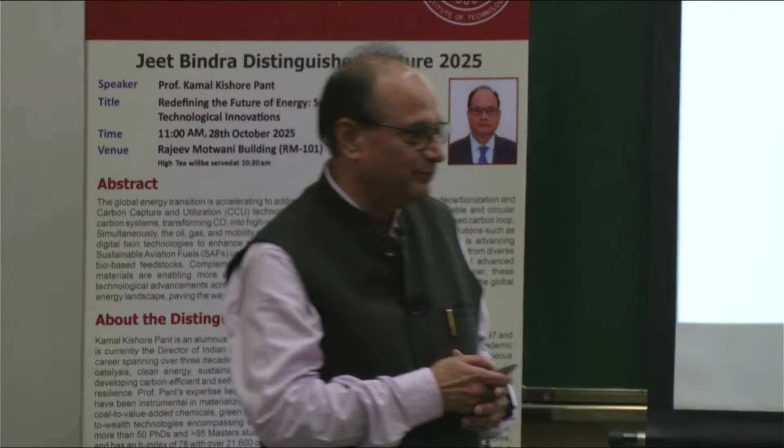And before going for the lecture, which is a very general lecture, I would like to thank Honorable Mr. Jeet for bestowing this distinguished lecture series to IIT Kanpur, and it's an honor for me that I am standing in front of all of you because of him here and delivering this talk. So thank you, Mr. Jeet, and his achievements are already well known, and I remember the Professor who had been my advisor, who graduated from here during 1968, and had been the Chevron chair professor, which was also donated by him.

I will just give this talk, if you look at the title, the energy scenario and industry perspectives, and especially for the younger generation, how can they move forward from their PhDs to the next level, whether in industry or academia. That's more which is challenging for the future, if you look at the transformational research, because everybody is talking about the applied research, everybody is talking about the translational research and how it can be multidisciplinary, interdisciplinary. Those things are also becoming challenges, especially for the young generation.

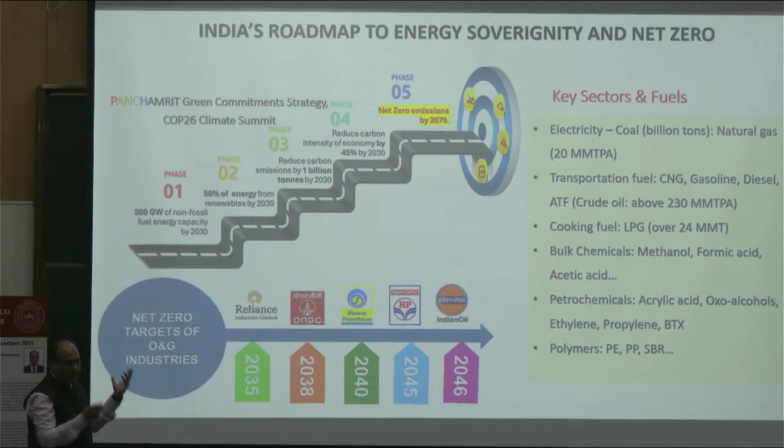You see what is happening, a term given by Honorable Prime Minister Modi ji also, and phase-wise, 1, 2, 3, 4, 5, and we are talking net zero by 2070. 3.4 billion tons of carbon dioxide are coming every year in India, and if you look at the world, 42 gigatons of carbon dioxide. So everybody is talking net zero. Different countries have given different kinds of yardsticks to be managed in order to control this, and you see that 500 gigawatt out of this 1000 gigawatt should be renewable energy.

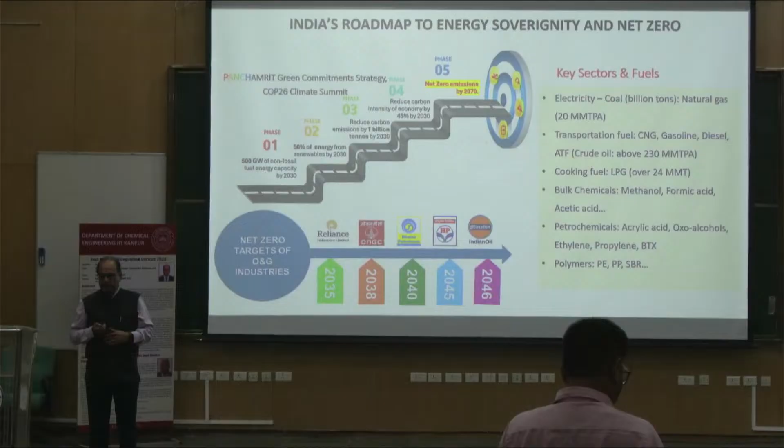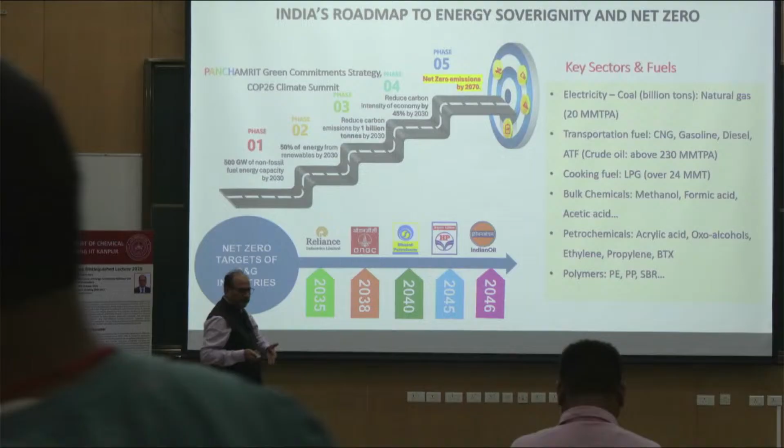Where will it come from? And we are talking green. How are you defining green? That's again challenging, because you are talking solar energy. Is it really green? Wind energy, maybe green, nuclear energy, pink. Different terms, words like hydrogen, gray hydrogen to pink hydrogen, have also been given terminology depending upon the carbon dioxide which is coming from there.

So this is very important, and you see that phase 2 is that 50% of this energy is to be supplied by renewable energy. 1000 gigawatt is the expected energy demand, and 500 gigawatt is to be achieved by this. Then the third phase is to reduce the carbon emission by 1 billion, that is, 1/3 of the carbon is to be reduced by 2030. And then phase 5, which is very important, is net zero. 2070 is quite far, but the target is 2060, because most of the developed countries are targeting 2050.

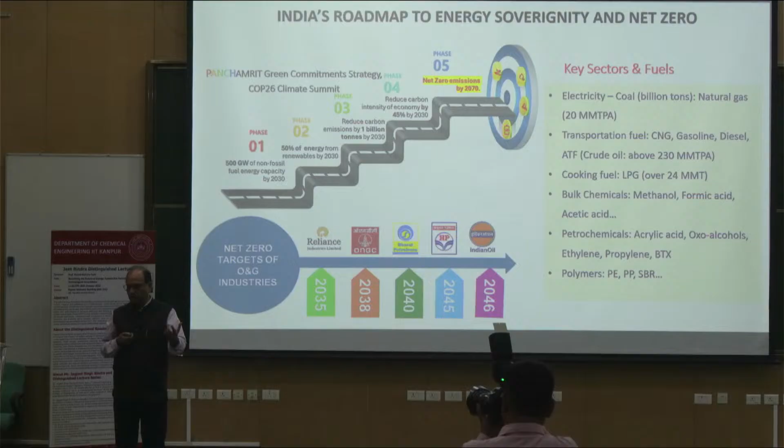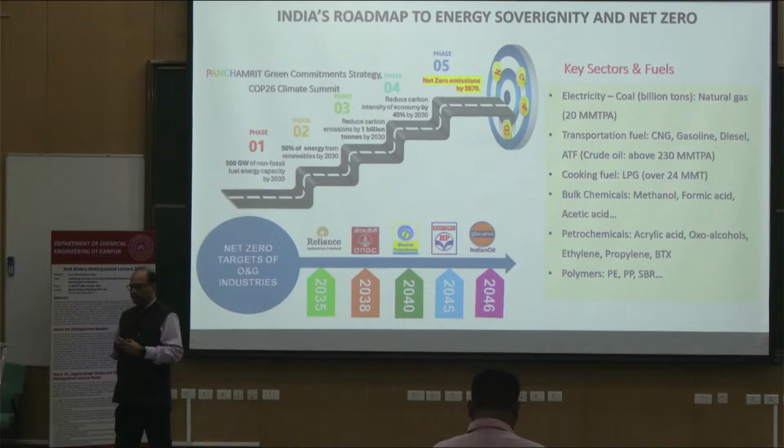So that is again where we have to match with the world, how they are moving and how the science and technology, which is coming up in a big way in the country, can bridge the gap. That is also very important if you really want to move from a developing to a developed country. So that is very important. And this is the scenario. All of you know these things.

So we are talking about a $10 trillion economy. That is the developed country we are talking about. By 2030, that is the 10 trillion. Presently we are around $4 trillion. So there is a huge gap. 25 versus 30, in 5 years you are saying that this $6 trillion is the additional economy which is to be generated, and how will it happen?

That's very, very challenging, and a lot of question marks are there whenever you talk about technology development, whenever you are talking in terms of the new research which is to be carried out.

40% of this primary energy, which is around USD 90 billion every year, is what we are importing, and we are saying make it fossil free. So that's again a challenge: what will we do if we don't import the crude oils? And there are a lot of issues, whether from Russia or the US or some other Gulf countries, where this crude oil is to be purchased at an economical price. That is again a very important question, because politically there are a lot of changes across the world. So that is also coming.

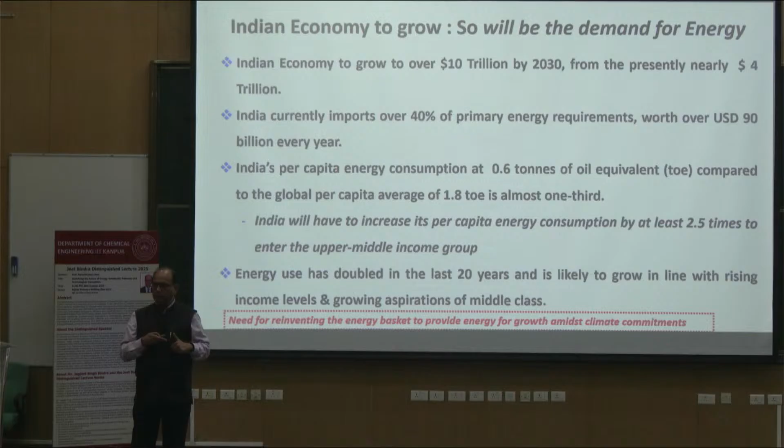And this is the demand and supply, and then climate change, sustainability, providing clean potable water and clean energy, and these are also integrated. Food, nutritious food, energy, and water. So this nexus is very, very important, because if you want to increase one thing, other things may be disturbed. So climate change, sustainability and balancing the ecology is very, very important and challenging.

So I say that coal remains, because 55%, or even 56%, is the share of coal, and as we are developing we have to reduce the consumption of the fossil feedstock, but still, even in 2047, there will be a share of coal. This is where we have to work on the indigenous coal, 240 billion ton of coal which is available, but it is high in ash.

So how can you design these? There are different kinds of fluidized bed gasifier, bubbling fluidized bed gasifier, entrained bed gasifier. What kind of gasifiers would be good? It is still a debate whether it should be just gasification, oxy-steam, pyrolysis versus gasification, what combination, and there are a lot of challenges because it depends on the amount of ash present in the coal. 20% ash versus 40% ash with Indian coal. So the entrained bed gasifier may be good for low ash coal versus high ash.

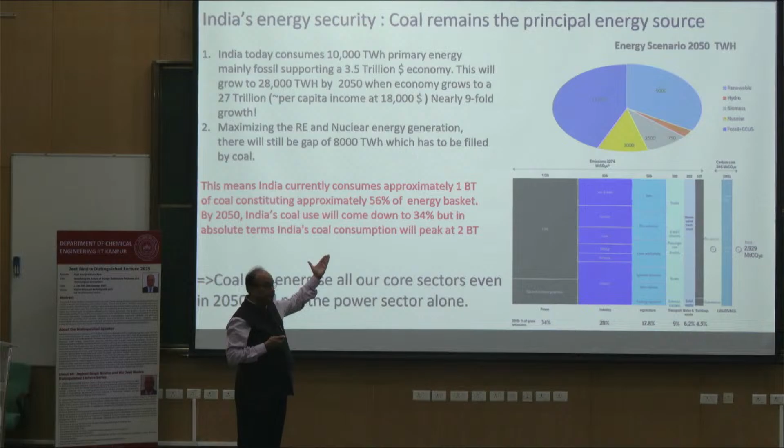So there are challenges which are to be addressed. What you see here: power is 34% of the consumption of energy, industry 28%, and different industrial sectors, and at the top, by 2050 in terms of terawatt hours, different sectors. Renewables will come up, no doubt, in a big way, but if you see the contribution of fossil derived feedstock, 11,750 terawatt hours out of the energy requirement we are talking about is still from fossil derived feedstock.

So something is to be addressed: how a low carbon product can be derived, or, if the carbon is high, how can you capture it? You know the hydrogen to carbon ratio is to be kept high when you look at a clean fuel. So how to get that? That's again very, very important, and we need to work. So coal will still be dominating, and that's why the Ministry of Coal, Coal India Limited, and the government are still emphasizing using this indigenous grade of coal effectively.

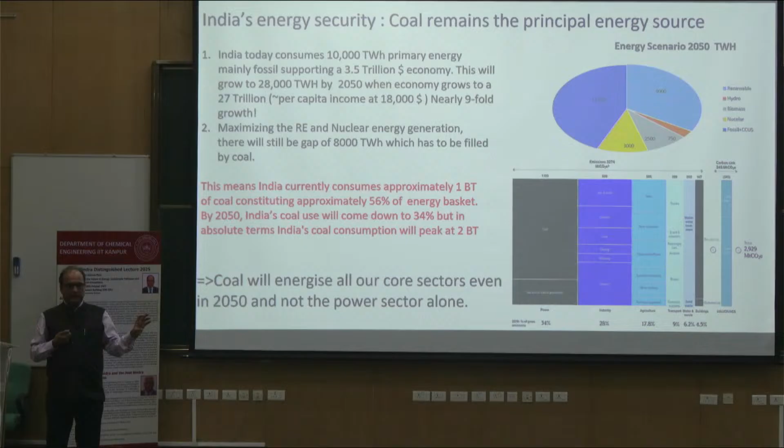So gasification or gasifier design is still a big challenge and a pertinent point for the industry, whether for power generation like NTPC, Thermax, or the refineries and petrochemicals, which are also using these grades for hydrogen or different kinds of chemical production. So a lot of work needs to be done in this area, 56% versus 34%, when you talk about 2 billion ton of coal which is being consumed or will be consumed in future.

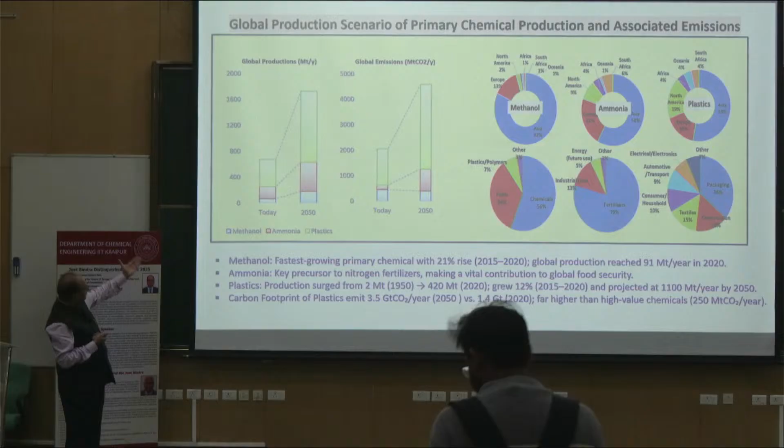This is the gap. You see today, 2050, when you talk about in terms of million tons per year of the productions, when you talk about methanol, ammonia, plastic, these will be the major products. And when you talk about plastic, huge amount of carbon, right? So net zero, when we are talking about a carbon neutral plastic, is it possible? This is what we are talking: the plastic where you have a high carbon to hydrogen ratio and you are talking carbon neutral, right?

So what kind of feedstock is to be used? And methanol, right? Just as I was discussing in the morning also, availability of methanol in India is a big challenge. And methanol is a very widely used chemical which is nowadays not only for refinery and petrochemical purposes, but also for vehicular fuel application.

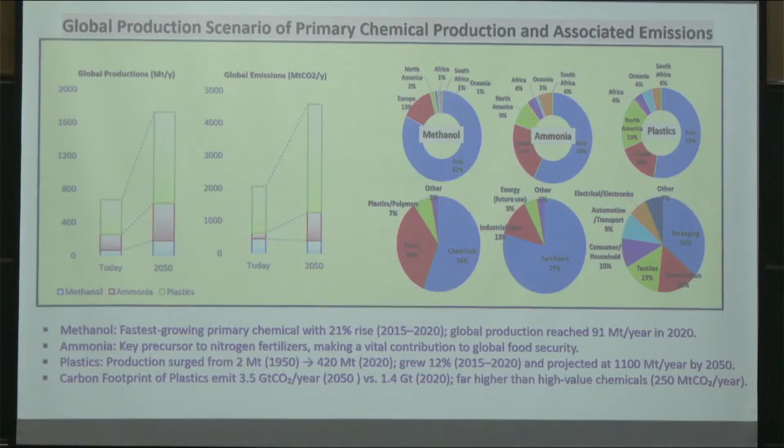So if you are using methanol for automobiles or ICE, internal combustion engines, you need to find out the properties for the vehicular application as well as the quality at an economical price. Because if your methanol is not available at an economical price, there is no use of producing methanol, rather import it from China or another country. So this is also a big debate: production within the country versus importing it from another country.

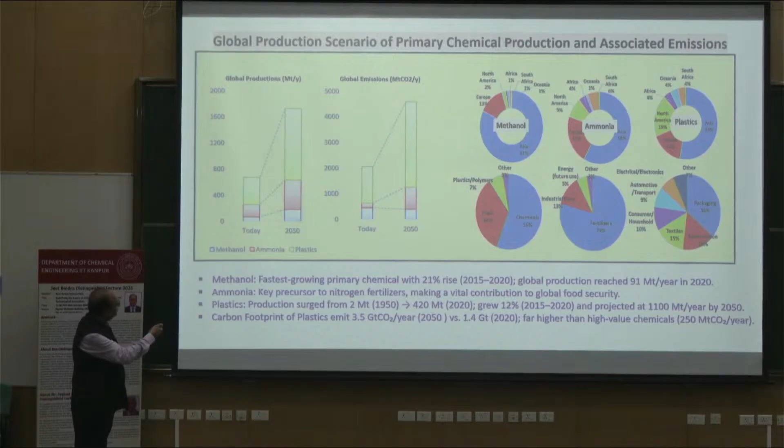So you see that methanol, ammonia, plastic are widely consumable chemicals for the future, and all the demands which you see here, in terms of how to bridge this gap. Because when you look at production of these kinds of chemicals, the carbon dioxide which will come from these products, the order of magnitude is reaching a level of 4,000 million tons of carbon dioxide per year.

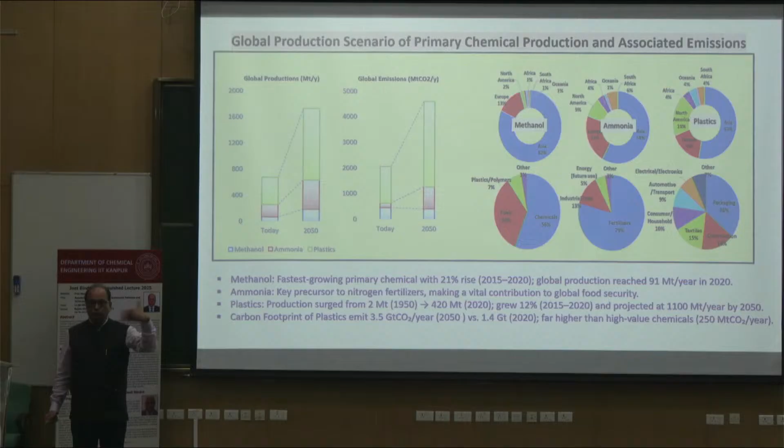So this is talking green versus producing carbon dioxide and adjusting the ratio of this carbon dioxide. On average, how can we reduce this number, say 100 grams of carbon dioxide per ton of product, to less than 100? That's where a lot of energy analysis, net energy rate, mass balance, process intensification, unit operation reduction come in. These will be new concepts for the future industry. Because reducing unit operations will definitely reduce the energy consumption in each process. So this is where we have to work on tabletop reactors, tabletop process design, simulate it, and then find out.

So this is what you see: carbon footprint, just an example for plastic emission, 3.5 gigatons per year, which we envisage by 2050 versus 1.4 in 2020. So plastic consumption is increasing, right? Even though we are talking about banning plastic, plastic-based chemicals produce 250 million tons of carbon dioxide per year, when you talk about higher value chemicals from fossil-derived feedstock and all these raw materials derived for the petrochemical industry, like olefins or aromatics, whatever is required for the future.

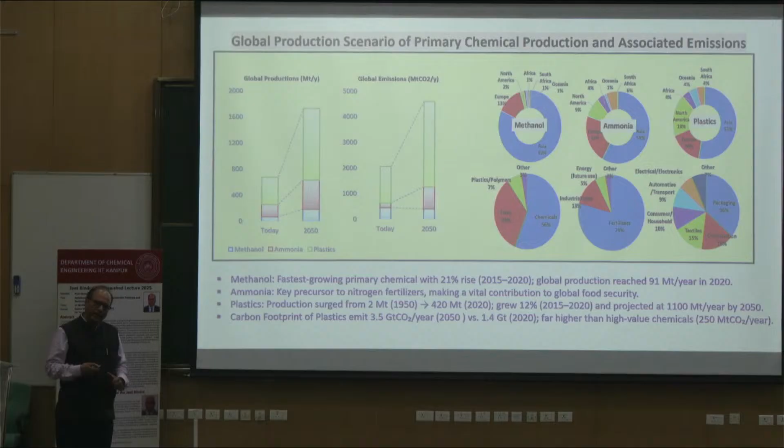So these last 4 bullet points are huge challenges which are to be addressed by refineries, petrochemical, fertilizer industry, steel industry, or any other pharma-based companies using these kinds of chemicals. So what to do, right? This is what everybody talks about. What to do? We have to do something.

The 2020s are being called the hydrogen era, right? Everybody has been talking for the last 5 years about green hydrogen, gray hydrogen, turquoise hydrogen, blue hydrogen. Those are from fossil-derived feedstock. Even turquoise hydrogen is produced from fossil-derived feedstock, just like methane decomposition, where you convert it into hydrogen and carbon nanotubes.

This is a good area. Dry reforming, I know many professors work on that. Dry reforming can also be used for syngas, then water gas shift reaction to convert it into hydrogen. And biogas can be used for that purpose. It cannot fulfill the entire demand, but part of the feedstock would be greener, and this is what the government of India is putting as a mandate for all refineries and petrochemical industries: that at least 20% renewable component should be involved with this fossil-derived feedstock.

So it means crude oil, add the bio-crude there, biomass, add bio-crude 20% of that and put it in the distillation unit. This is just one of the options which I am talking. Alternate can be also there.

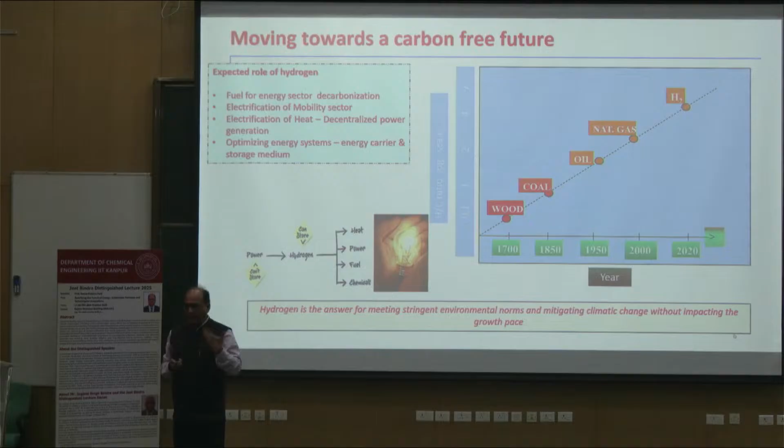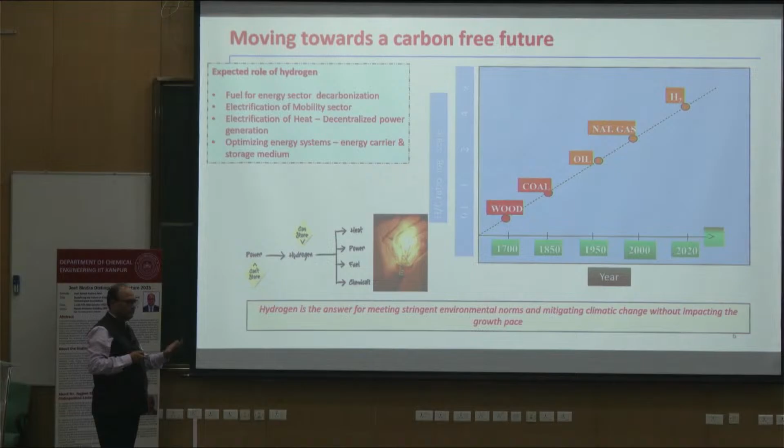So we need to look at all these kinds of things when phasing out wood and coal and moving towards natural gas or high hydrogen-to-carbon feedstock, which is the need for the future. And I think 2047 is far away, Viksit Bharat. But when we talk in terms of science, technology, research or academic units, I think it should start, and it has already been started, and we have to find out where we will be in 2030. We need to work in these areas.

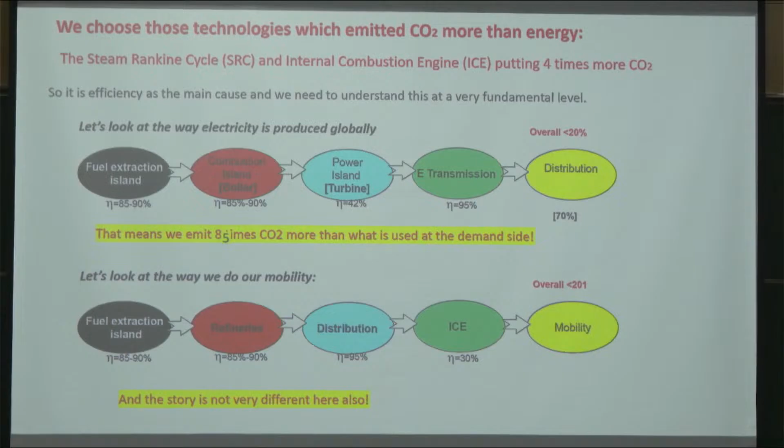You see that just traditional, right? You all study these things, right? Rankine cycles, combustion engines. You see the end point: less than 20% efficiency when you use your gasoline. Diesel, 20% efficiency in everything. And individually what you see, this is where we are, whether it is e-vehicle, vehicular application, or industrial. So efficiency is very low.

It means there are a lot of opportunities in between if we can improve the efficiency, or get rid of a couple of these intermediate steps. So the removal of the intermediate, what we call one pot, tandem process, a lot of things are to be done in that area. We are working at just 30% efficiency, and overall efficiency for vehicles is just 20%. That's why people move towards fuel cell vehicles, reaching towards 60% efficiency, or better than those where you can reach efficiency levels towards 90 or 98%.

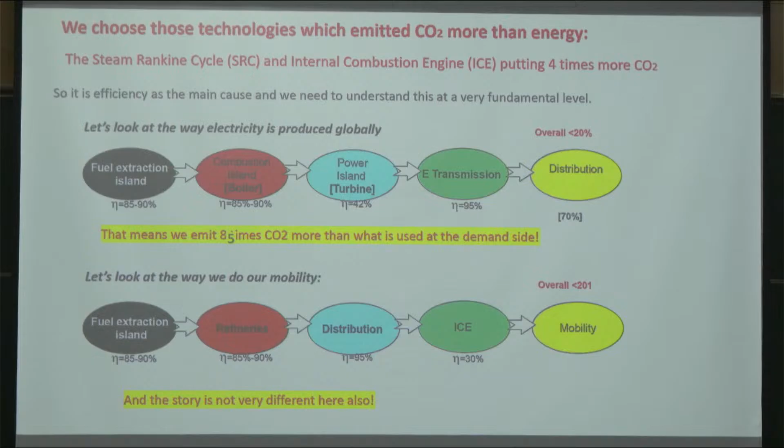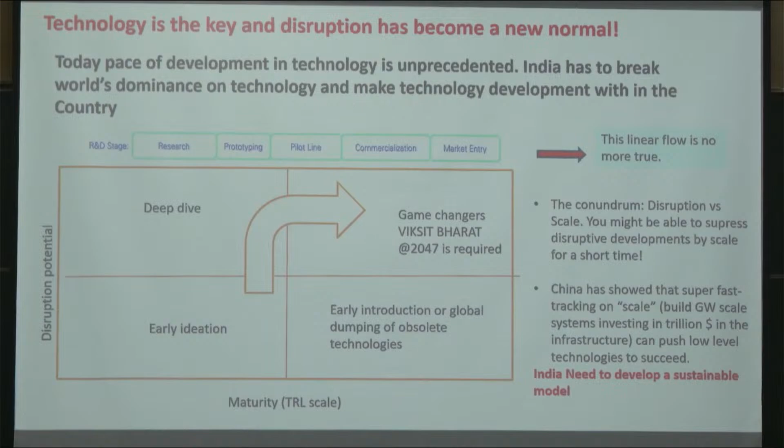I think that is the one thing: energy production and designing the system in such a way where the losses are at a minimum, and it is also very important to work on these traditional Rankine cycles or ICE or alternate vehicular applications. So this is where the straight linear versus some kind of bending in between is important in terms of the disruption potential.

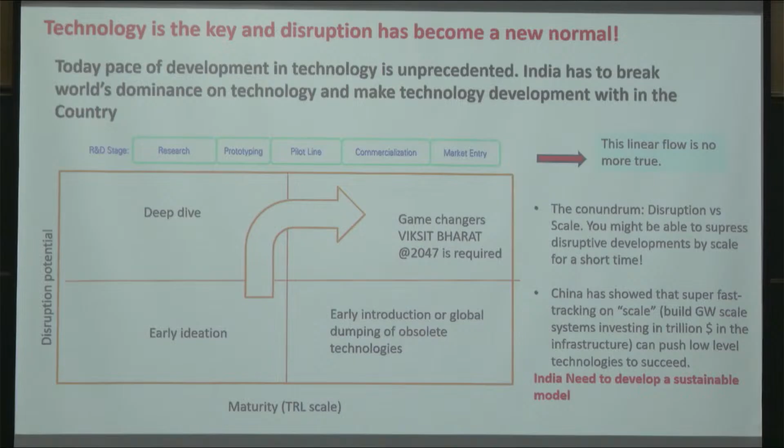And when you talk about the technology readiness level, what the industry actually wants and what research is being done. Most of the time academic research is limited to TRL3, but I think there is a need, when the ideas are there, for ideas to innovation and investment. This is what the younger generation is now doing, with startups coming up in a big way, and the concept of tinkering labs now being used. So when there are ideas, we have to work so that these ideas can be taken to the next level.

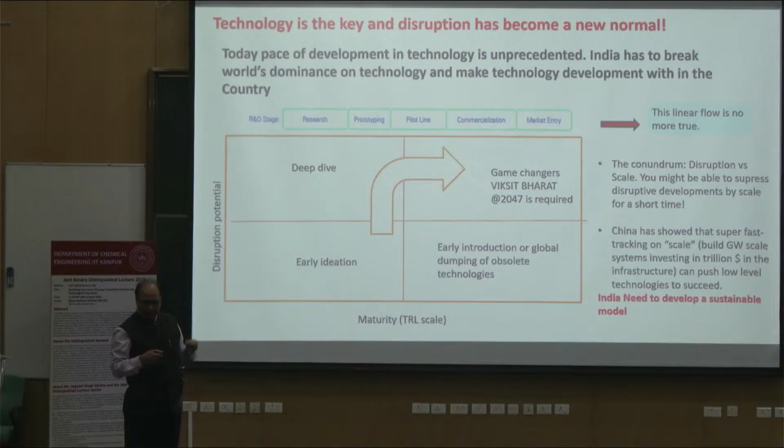So when the ideas are there, we have to work on that and bring it towards a maturity level, and that is where TRL9 and then commercialization is required. And you see disruption versus scale; this is the conundrum. You might be able to suppress disruptive development by scale, and that's why everybody gives the example of China, because when they have the ideas, they invest huge amounts of money, and sometimes reverse engineering is also done by them.

So reverse engineering is also accepted. You get the right product, open it, study it and then develop the new process, and that is also very important. I think the government is allowing that kind of reverse engineering also, and we should work in those areas.

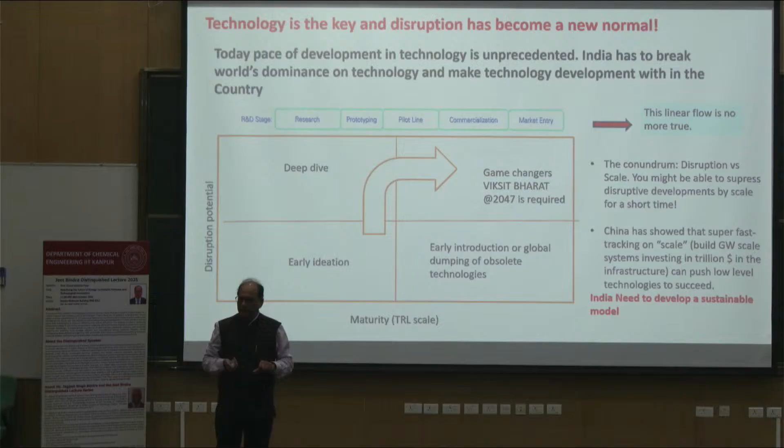And most of the time, you see even industries like e-waste and metal extraction, the factories and companies buy the equipment from China and put it here. Okay. But now do reverse engineering on that, improve the efficiency and develop the product within the country, rather than purchasing again and again from there. So I think that is also very important for the future: developing a large maturity level from ideas to the product.

So past, present and future. So future, of course, everybody is talking about green energy, right? But how much green, that will be a little bit questionable, right? But that's true that the coal, nobody likes, it's a black and dirty material. So coal, petroleum, natural gas, already, right?

People are moving in that natural gas demand is increasing, and future will be somewhere where you talk about the hydrogen, biomass, biopolymers and all these things, right? Tissue engineering, healthcare, all these things are coming up using these kind of biomass-based products. So lignin, cellulose, and India has those kind of, right, the pulp and paper industry where these kind of materials

are available, and that is where e-market is coming up, electro-based, right, where the methanol can be produced, plastic can be produced, so e-plastic, e-methanol. So that is again another terminology which has been given in terms of green energy. And for these, you need to do a lot of R&D, right? You have direct air capture, carbon storage, and then convert it into value-added products, that is utilized, point source capture. So many things are there. All of you must be aware.

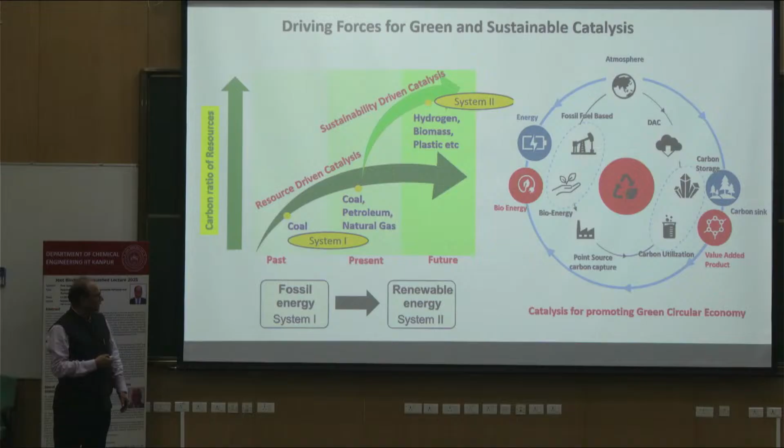The fossil energy system is to be replaced by the renewable energy system, and that is very important for the future. I'm not going in detail of this, but one thing is clear in this, that we talk about 3 tons per ton of the carbon dioxide which is being produced per chemical produced, whatever the chemical.

And the last thing which you see, recycling, circular economy, that will bring to that level, right, versus biomass also to some extent. But if you talk just the carbon capture and utilize it, then the electric energy which is required, what would be the source of that electricity? Means we are capturing carbon dioxide, converting into other product, but how much energy is required to convert carbon dioxide?

You know, it is a rigid thermodynamic molecule. It will require huge amount of hydrogen, and where from this hydrogen is coming is a question. So conversion of carbon dioxide to value-added product, although a lot of R&D is being done, but the success story is not good. This is the fact. So this is where we have to catch the market for the future, that required carbon dioxide or CCUS.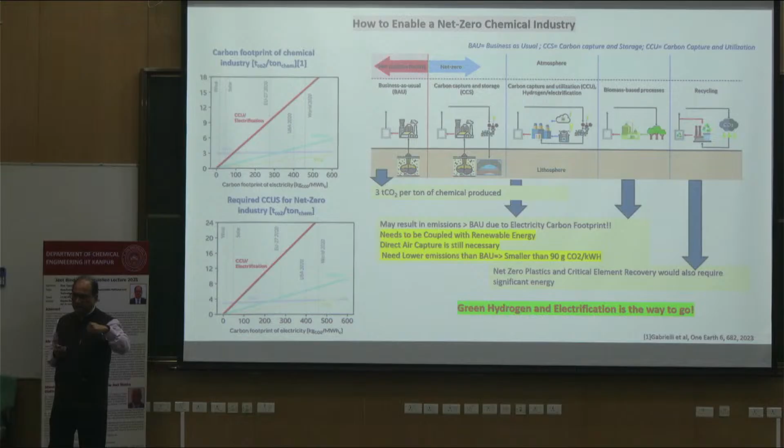CCS may be easier because there you are not using hydrogen, but for CCU, although CCU is much more desired by the industry, process industry, the challenge is there that you have to look at your business as usual, that is due to the electricity carbon footprint, because whatever the source of energy you are using for producing the hydrogen, that is making this carbon dioxide conversion into fuels and chemicals a much more rigid and energy intensive process.

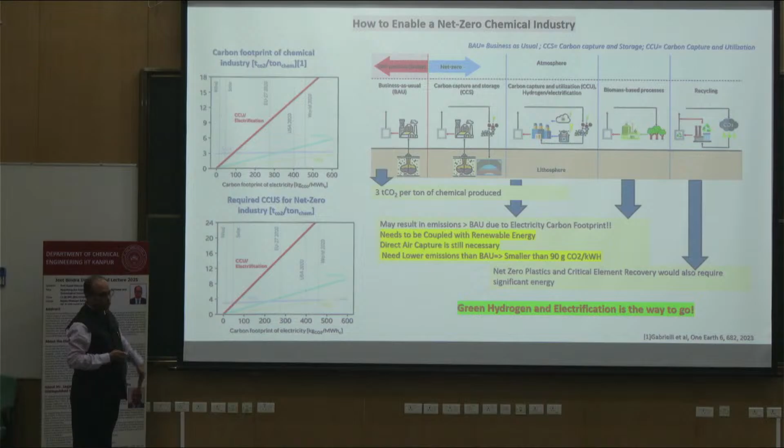And that is the last one where you have to look at, you have to work in those areas, and then you have to find out that 3 tons carbon dioxide per ton of chemical produced is to be reduced much below. So that's where the numbers are. Already the US and some developed countries like France and Europe, they have achieved this model, 90 gram carbon dioxide. So below 100 is a good number.

So this is what you see the pace with the refinery. When you talk about the refinery, petrochemical, integrated approach, you say that your carbon feedstock transition is very important, and we have to find out the new kind of materials, raw materials at a sustainable economical price. That's very important. And then your pace of technology, because this is where the disruptions are in between. So this is not a straight path.

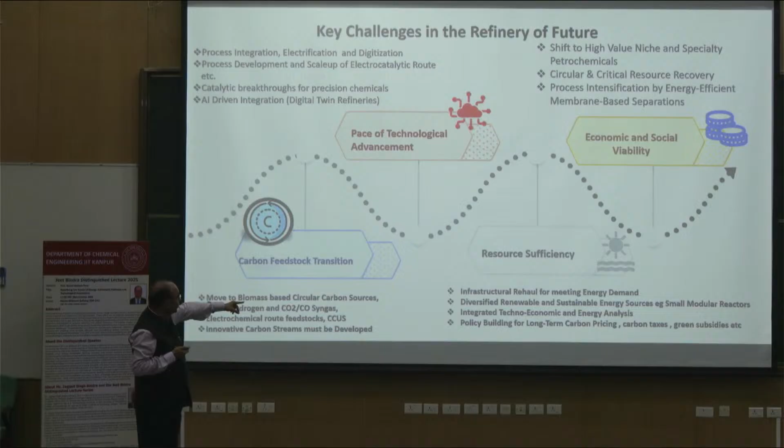Disruption in terms of technological advancement, which is very competitive. Resource sufficiency, because sustainability is very, very important. We have to work on that. And economic and social viability, again, commitment toward the society. And this is where the challenges are to be addressed, that AI-driven digital twin refinery. Data are available, right? And we have to study this real-time data analysis.

And that is where I think there are a lot of opportunities for the younger generation, those who are working on AI-assisted technologies and developing these kind of digital twin refineries for the future. And then some kind of process intensification like membrane-based processes, because the distillation process needs to be replaced.

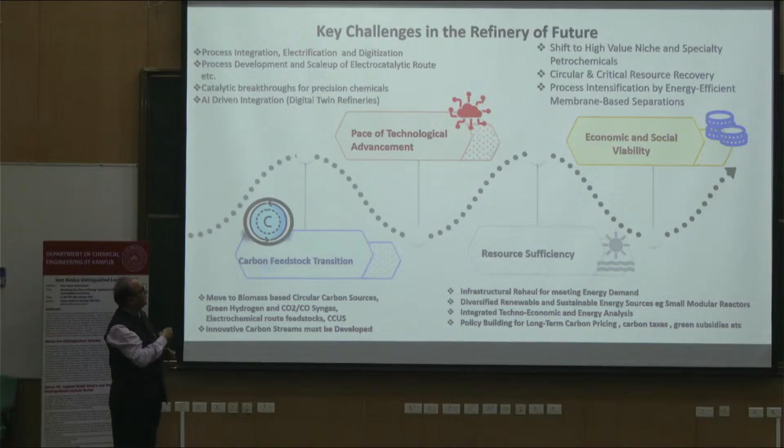It is a hugely energy-consuming process. So if these can be replaced by low-cost, more resistant membranes, I think that is also very, very important for the future. Circular and critical resource recovery, a shift to high-value niche and specialty petrochemicals, that is where I think the future is in terms of the refinery, and they are putting a lot of pressure on that.

You see the different types of emissions measured as S1, S2, S3, right? So S1 is direct emission: refinery combustion, hydrotreater, cracker, steam methane reforming, all these are emitting a huge amount of carbon dioxide. Scope 2 is indirect energy emission: electricity from the grid, natural gas, crude oil, all this. Scope 3 is indirect energy emission from the use of conventional fuel, road transport, industrial.

So all these are contributing to carbon dioxide emissions, and the left-hand side is giving you the real picture. This is the steam methane reforming, right? You see the products, ammonia, methanol, ethylene, propylene, aromatics, all very important products from the petrochemical or refinery. And in every process you see the carbon emission per ton of product; a huge amount of carbon dioxide is coming. And if you look at capture, you have to invest money.

So this is the future, where with fossil feedstock you have to capture the carbon; that is the conversion approach. On the sequestration side, you have to look at unrestrained release of carbon dioxide, capture and storage, and finally thermal power generation and also renewable power generation. Where will we go from here? This is just speculation. And how can we work on these in terms of indirect energy related, direct energy related, and process related emissions.

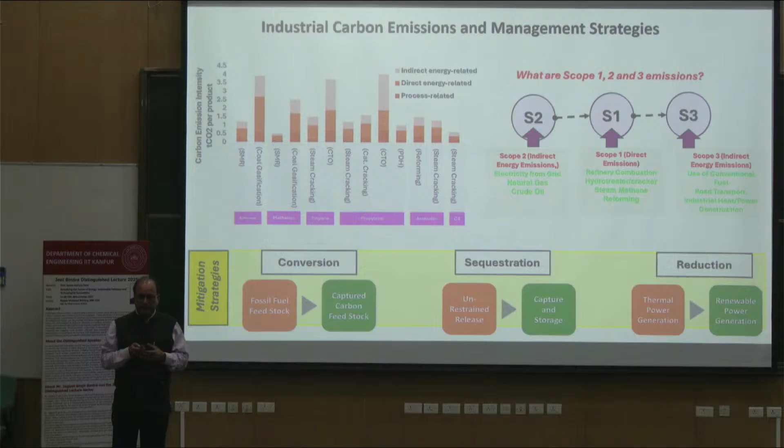And again, there are a lot of challenges and opportunities for the future in terms of R&D. In every sector we have to do a carbon analysis, some kind of life cycle assessment, and then find out the net energy rate required for a given process. So process intensification, traditional thermodynamic analysis, exergy analysis, these would be required for every process industry, and try to miniaturize the size of the refinery, a tabletop refinery. That should be a concept for the future, and this can be done.

There is one example I have kept here, because we work on methane decomposition to hydrogen and carbon nanotubes, and are now working on biogas methane decomposition, which can be called green hydrogen. So these are the challenges, and refineries are now addressing what substitute can be used for traditional steam methane reforming. Now there is ammonia-based, plasma reforming; plasma processes are also low-temperature, non-thermal plasma.

So the typical Haber-Bosch process for ammonia synthesis, which is done at 200 atmospheres, can be done at atmospheric pressure now. So this is where the trends have come, but how will you scale up those kinds of reactors? That is again very, very important for future study. So non-thermal plasma for ammonia synthesis, and for CO2 conversion and reduction.

Just a typical example: the energy consumption of steam methane reforming is 3 to 4 kilowatt hours per kg of hydrogen, versus with carbon capture it reaches a level of 45 kilowatt hours. Why would one do that? Because the energy consumption has changed from 3 to 45. And if you go for water electrolysis, people are talking green hydrogen, right? But this is the data, around 2022: 45 to 49, up to 55, that is the range for water electrolysis. But methane pyrolysis has the advantage.

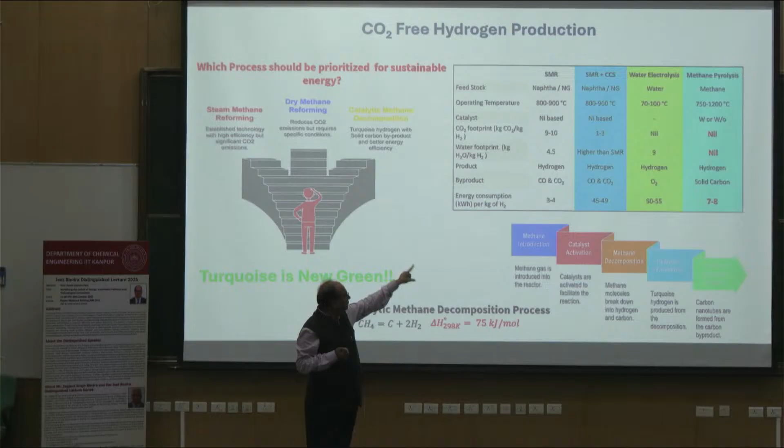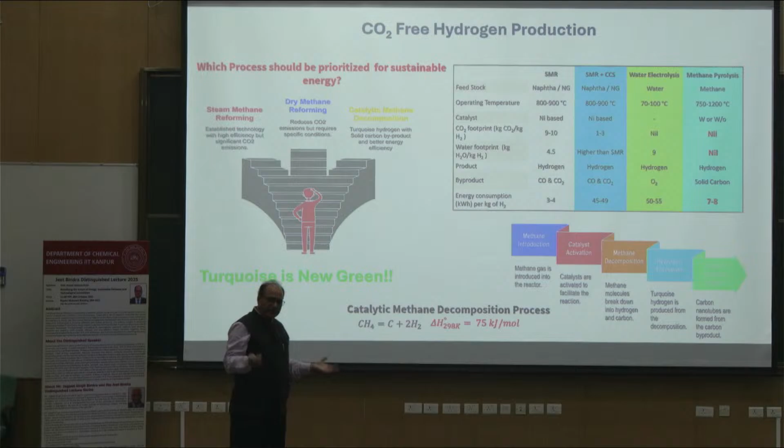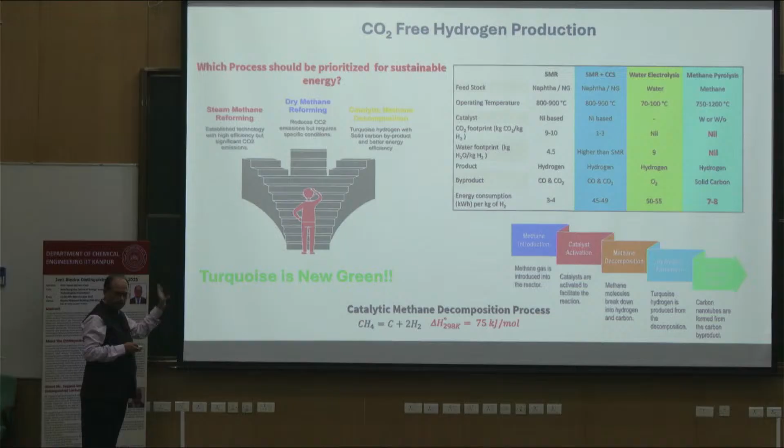You are getting the carbon as a solid, no need to capture it; the only thing is that catalyst design and reactor design may be challenging. Different heating approaches can be used, and you can have turquoise hydrogen. Turquoise hydrogen is very close to blue or green hydrogen. So that's what we need to work on: how to take the existing established technologies, revamp them, or find ways of improving the technology. So turquoise is that kind of word. You see the complexity for the future refinery, right?

All kinds of feedstock, not just the fossil-derived feedstock, but look, everything is there. You have the waste, MSW, use it there. You have the plastic waste, use it there. And several renewable energy components like solar energy, wind energy, natural gas, biogas, crude oil. It means whatever you have, you use it in the refinery, and then you have to find out the design. You work for that, right?

So versatile kinds of feedstock, and then find out the methods, how it can be, whether oxygen is required, hydrogen is required, where these will come from, and then you have blue hydrogen, and this is where you directly integrate it with the petrochemical, because the gases which are coming can be integrated, and you can have e-fuels, you can have all green, and the ammonia which you call blue ammonia, calcium carbonates, and carbon dioxide. So whatever you have can be used for multiple purposes.

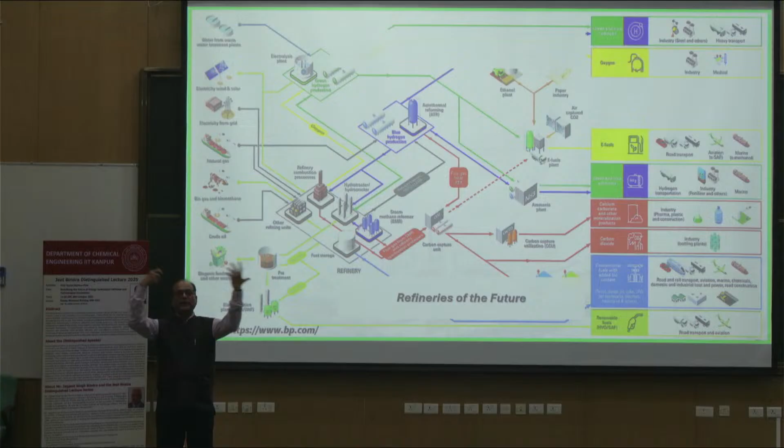So this is where we talk zero waste, or, as an academician, you must have read about the E factor, right? How much pollution you are creating when you are doing that. Because thermodynamics simply says that when you are converting A to B and A to C, if B is desired, you try to work toward 100% B. Thermodynamically it may be difficult, but you have to work for that. You have to use some technique in between which can disturb your thermodynamics.

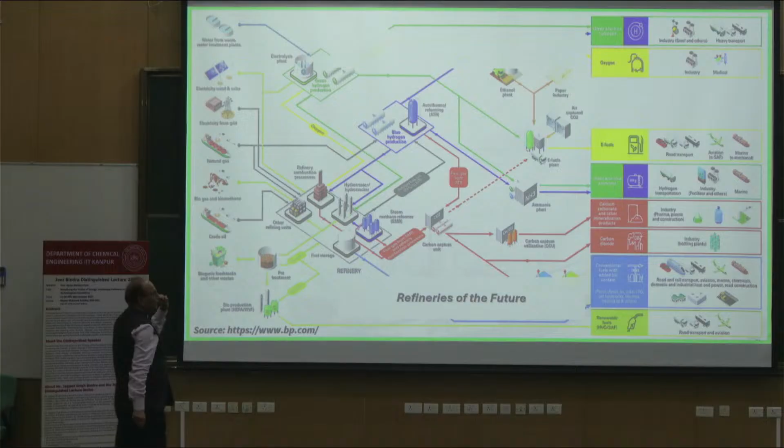So we have to talk about atom efficiency, and this is very important, that 99.9% should be your desired product. Otherwise, a lot of energy is wasted, or for the separation of the product. This is the challenge. So something is to be done where the unit operations going on in the process can be minimized, and for that also a lot of work is required.

This is again just an example. We are working on this. So gasification versus combustion. Both are used for power generation or maybe some kind of coal to methanol process. But you see that in terms of coal combustion, you have to use CCUS, then the carbon dioxide or the products you have to sequester, and then with coal combustion you have to work with the steam cycle. All of you know these things, power distribution. So if you look at the overall efficiency of the process, it's very, very low.

The second thing you see is coal gasification. This may be a little bit questionable also, but you have to do a complete energy analysis for both again, and now tools are available. This is hydrogen or mineral, whatever you use for gas cleanup, acid gas removal, all this. You have power, you have hydrogen, chemicals. So when you talk about the energy analysis, this is a higher pathway and gives you multiple products. That's why I think combustion can be replaced by gasification, and this is what's shown here: 8 to 12% efficiency versus 48% efficiency.

So this means analysis is required, of unit operations in every sector, exergy analysis, and these are the new opportunities for design of new units for the future generation. So this is where the gasification itself is a very, very costly affair. And when you talk about how good a gasifier is, whether it is an entrained bed or a bubbling fluidized bed, all of you have read the traditional Levenspiel. So how it can be done, this is where I think the work is required.

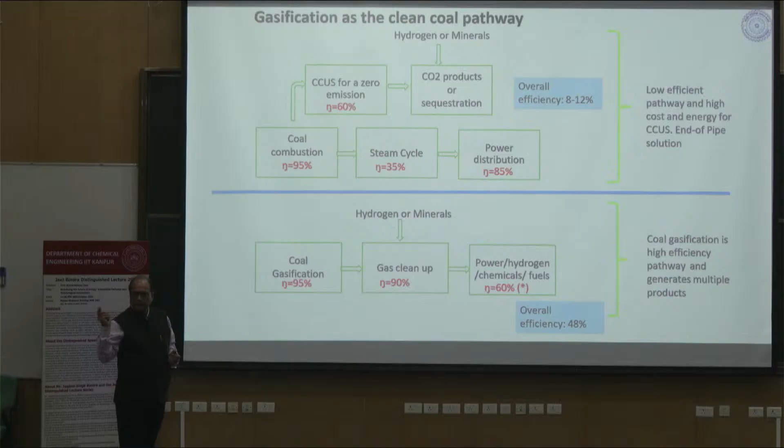So this is the work which we did with Thermax as a partner on coal to methanol, supported by the Department of Science and Technology, a notional plant of 1 ton methanol. We used just the high ash coal, 40% ash coal, and lignite-based coals, which are considered not good. Most thermal power plants blend Indian coal with some high-grade imported coal, either from Australia or Indonesia, and then gasify it. The reason is that gasification of high ash coal has a lot of issues in terms of ash, clinker formation, and the hydrodynamic study.

Most of these things, whether it is what should be oxygen, what should be steam, these ratios are also very challenging, and that's why there are a lot of opportunities to study. If these issues can be resolved, then there are opportunities for the industries, or Ministry of Coal and financial support also in these areas.

So you see that gasification, and then you do some water gas shift reaction, that depends. You will have, again, carbon dioxide from there, the acid gas removal unit, and all gases are removed, and finally this is the CO2, and the CO2 is again being sent into a reactor because we want to use CO2 hydrogenation and produce methanol in a single unit.

So this is the second part of the Thermax project which you see on the upper part, but this coal to methanol 1 TPD is a notional plant working at Thermax, and there is the need for design of these kinds of gasifiers, which are still a challenge: 10 bar pressure versus 5 bar pressure gasifier.

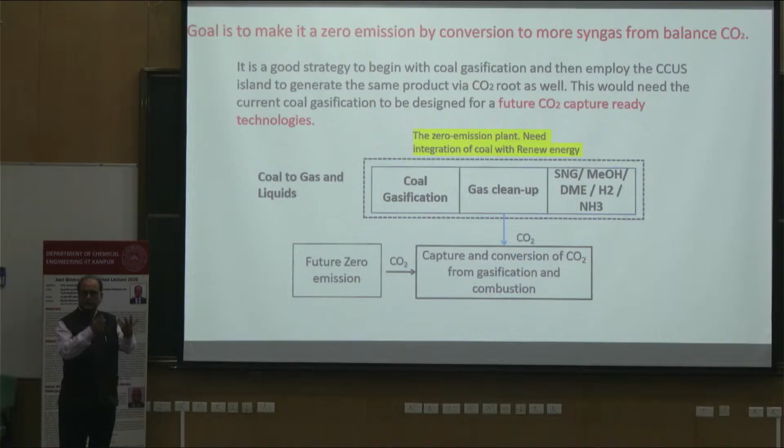So when you talk about the need to integrate coal and biomass, we need to work in these areas: coal to gas and liquids, coal gasification, gas cleanup, because when you do this, you can convert coal to chemicals, or coal to hydrogen. That's one approach. It can be hydrothermal, it can be a slurry reactor, or another kind of gasification. And when this is done, you can mix it with biomass also, coal plus biomass, or just convert biomass or municipal solid waste into RDF, refuse derived fuel, and mix it with the coal.

This is what NTPC now needs, 10,000 tons per day of this bio coal, because of the guidelines which have come up. So bio coal is also very, very promising. You convert the biomass to bio coal by torrefaction, and then transport it, because you are increasing the density of the feedstock. So parali burning and all these things you hear about near Delhi, Punjab, Haryana, those can be resolved, and even in Uttar Pradesh also.

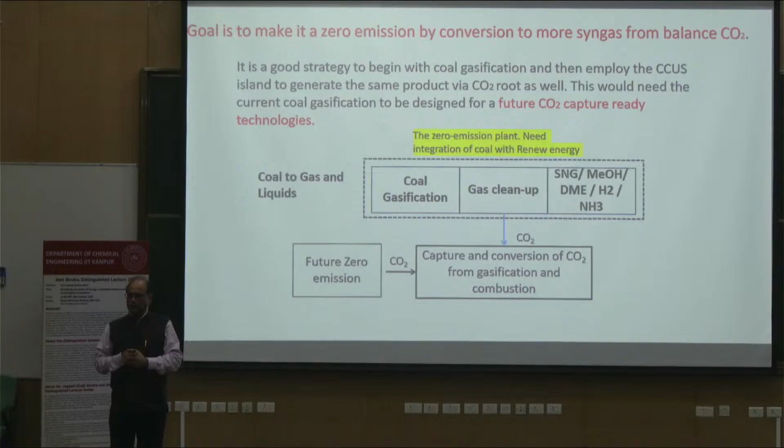So again, this is a wider spectrum: carbon dioxide from air, bioenergy, carbon capture and storage, fossil derived feedstock. You have to understand the chemistry of this, how much hydrogen would be required. Critical minerals are very, very important, because if you use catalysts, these are again precious metals and challenges for the future.

So spent catalyst metal recovery, converting them again into useful catalyst, versus the minerals, extracting the metal, because all these, whether energy storage materials, lithium, cobalt, manganese, graphite, carbon, are very, very important. So integration is required. You have to select the process from the different processes given here. All processes have pros and cons, and that is where we need to find out which process is the best. For one feedstock, it may not be a single process.

You have to find the most optimized process, and a lot of things are still at an infant level when you talk about carbon conversion, because carbon conversion is not a good idea in terms of the energy consumption in the process. Availability of hydrogen at an economical price is a big challenge. So this is, I think, where a lot of work is required.

This is what I said: carbon dioxide plus hydrogen converted into methanol or dimethyl ether or any chemical, olefins, SAF, everything can be done. But the question is where you get the hydrogen from. So this is the irony: 27 kg carbon dioxide, if you just use steam methane reforming, write down the reaction, around 13.5 it will come. Same thing with different kinds of feedstock, crude oil, where the hydrogen to carbon ratio is low.

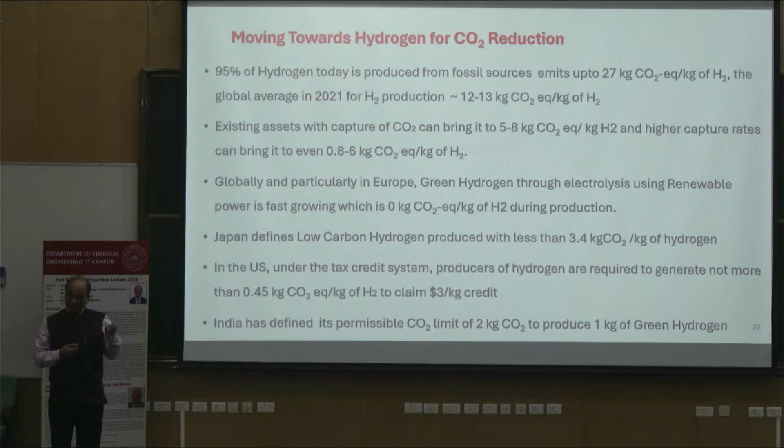So hydrogen at economical prices and green hydrogen which will not emit carbon dioxide, that's the challenge for the future, and that is again where the work is required. So this is where Europe, green hydrogen through electrolysis with renewable power, which is growing, is 0 kg of carbon dioxide per kg of hydrogen. So this is where an economical price matters, because cost will be very, very important for all these processes.

So when you see the refinery trends, it is very, very distributed now. The same refinery produces diesel, kerosene, and the same refinery can produce petrochemicals, methane, all kinds of monomers, polymers, asphalt. And this is the concept for the refinery where you use water, carbon dioxide, biomass; a kind of green refinery they talk about now, hydrogen refinery sometimes. So different words, but all these kinds of processes are required for the future in terms of conversion and transformation of the product. This is the need of the hour.

When you talk about e-methanol, I was talking about that. So in the pulp and paper industry, India has the potential of 20% of India's pulp and paper which can have biogenic carbon. This is the purest form of carbon dioxide. You need not work hard for separation, because in coal gasification the separation of the gases itself is very tedious, because there is ammonia, carbonyl sulfide, hydrogen sulfide, so acid gas removal systems, all these things are very, very costly.

But in pulp and paper industries, or the fermentation industry, that carbon dioxide is pure carbon dioxide. And that can be fermented, used for different purposes, and that's why words like e-methanol have come. LanzaTech, you see, in Panipat they have the 200 TPD plant, although there are some issues, because the enzymatic and biotechnological route is another important one, where temperature, pressure and energy consumption are low. But the only thing is that the conversion kinetics is very, very slow.

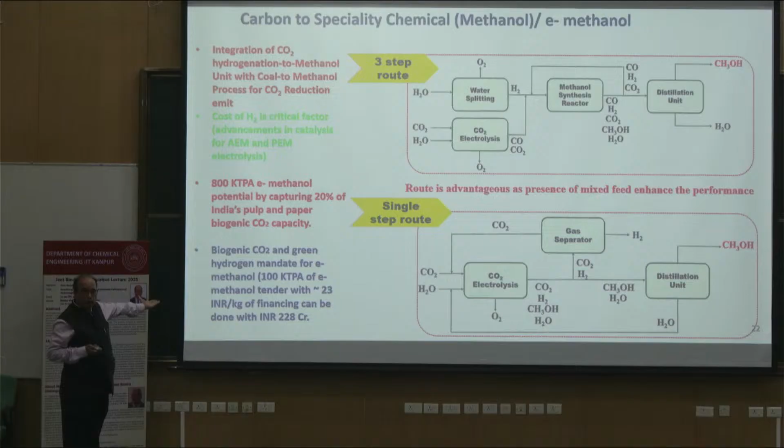So membrane design, all these things are very, very important. So biogenic carbon dioxide, green hydrogen, and this e-methanol: 100 kiloton per annum of e-methanol has already been tendered at 23 Indian rupees per kg, that will be the cost, and the financing is of the order of 228 crore for this kind of project.

So pulp and paper carbon dioxide, fermentation-based carbon dioxide, these can be converted into chemicals, and these are much greener chemicals, and that is the electrochemical routes. You can talk on those processes. So, right, green hydrogen supplementation, because you have to integrate the carbon dioxide if you are talking about conversion and utilization, then all these factors are to be considered.

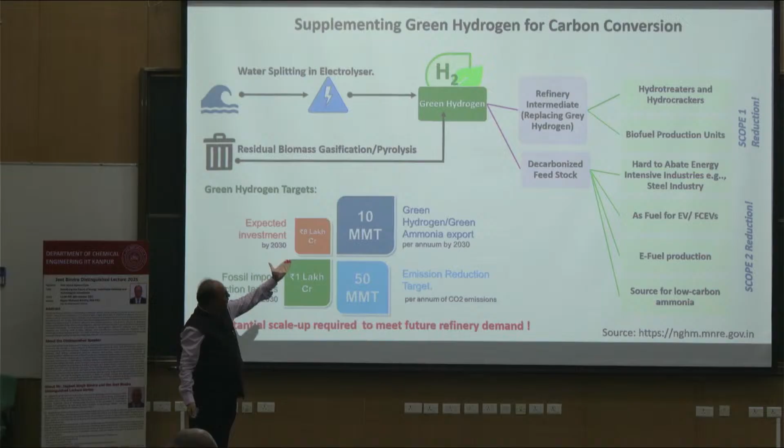So these are two integrated approaches: green hydrogen production, and the emission reduction targets which have been given in terms of carbon dioxide by production and emissions by 2030. So substantial scale-up would be required if you look at the 2030 opportunity: biomass gasification, water splitting, refinery intermediates, decarbonization. These are the steps where scope 1, scope 2, scope 3 can be done, which I talked about in terms of energy consumption.

So, like all of you are talking about machine learning, artificial intelligence, DFT, these will play a big role, because without doing experiments some theoretical studies would be required. And fortunately, the correct data is available now. So we can select the correct data, do some theoretical analysis using computational methods, because characterization tools are also available, and then do the reactor design based on that, in terms of heating also, whether it is induction-based heating, plasma-based heating, microwave heating, or thermochemical, where the energy will be coming from, and then how this can be made renewable, whether it is solar, hydro, wind.

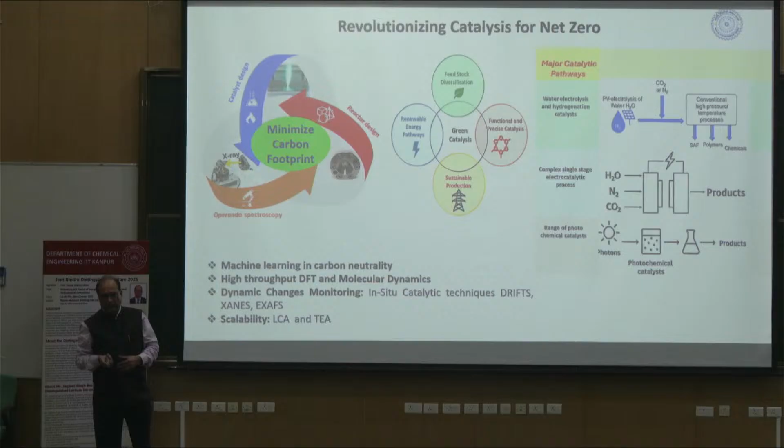So renewable energy pathways you have to find out and do some catalysis, because catalysis can change the entire spectrum of research. So green catalysis we talk about nowadays. The existing catalyst versus the novel catalyst: there are a lot of opportunities in developing technologies, in liquid phase, nanoparticles, single atom catalysts, those things are coming up, but how to synthesize them and make them sustainable, tuning low-cost materials instead of using the traditional platinum group metals. So find out the ways, and then you have plenty of opportunity in terms of product formation.

So machine learning in carbon neutrality, high-throughput DFT calculations, molecular dynamics, dynamic change monitoring like in situ catalysis. So DRIFTS and all these in situ studies, XANES, EXAFS, all these highly sophisticated tools are now available for doing the research, and that is, I think, what we should work on.

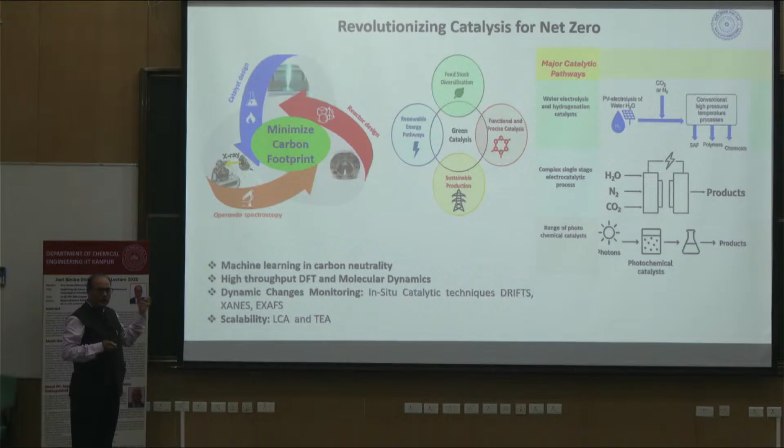And finally, when you talk about commercialization, life cycle assessment is important, techno-economic analysis is very, very important, because otherwise industry will not come forward. We have to satisfy the industry in terms of sustainability of the raw material, sustainability of the product, and finally the energy consumption in the process, and how green the process is, that can be defined.

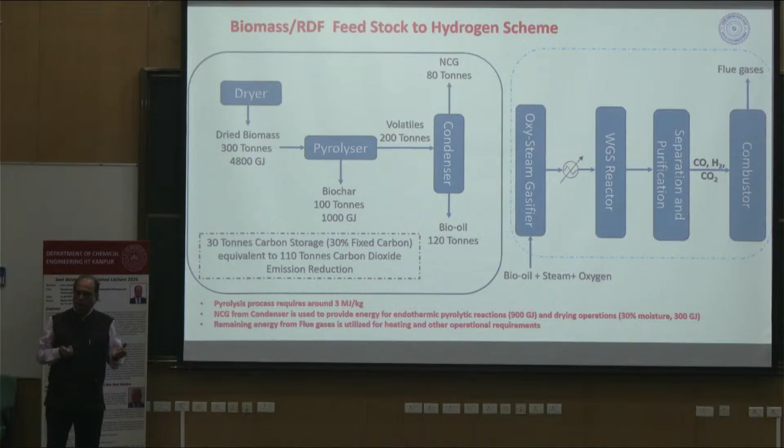This is also work which we are doing as of today. That's the biomass, right? So you have plenty of biomass. In total, when you talk about biomass, there are 200 billion tons available, and out of that 240 million tons are available all around the country. And this can be used effectively in bio-based refineries.

So low temperature versus high temperature. Both approaches are there. You can convert this biomass, depending upon lignin, cellulose, hemicellulose, into fuel, lubricants like furfural, alcohols, DMF. You can convert it into different kinds of chemicals, cellulose, low calorie sugar, C5, C6 sugars. Those can be converted, what you call total reducible sugar, into different products by understanding the right chemistry and catalysis, and this can be done at low temperature.

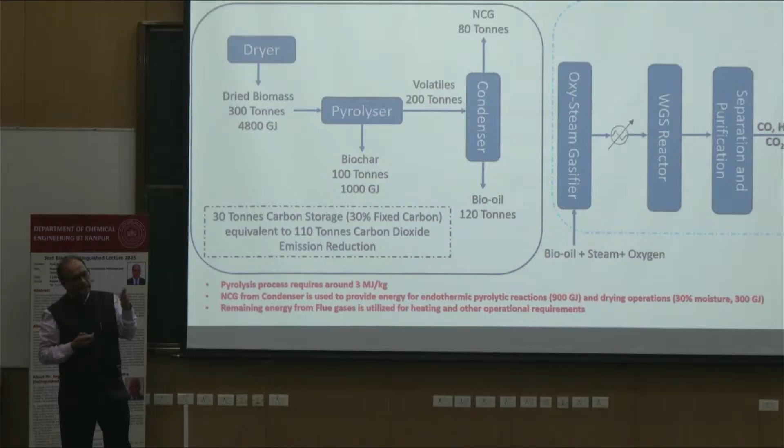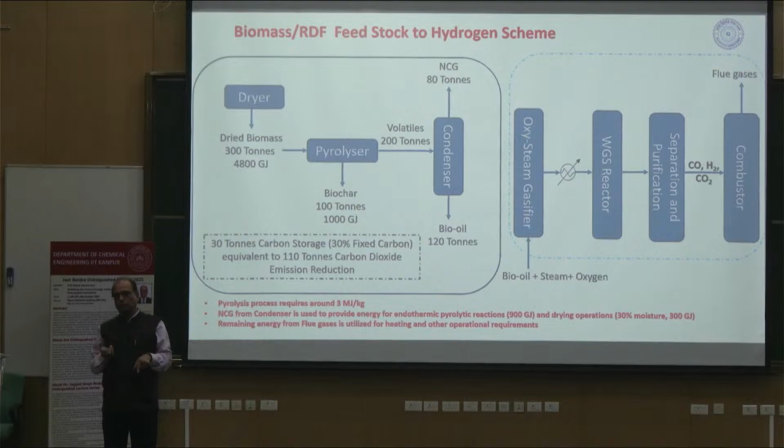High temperature is where you do pyrolysis or gasification, and this is where you talk about energy. So decentralization of these processes is very, very important when you talk about issues like parali burning. Because collection and segregation at one point, then convert it into high density material, torrefied biomass, which you call biocoal, and then transfer it to the refinery. Or the second option could be you convert this biomass into bio oil and transfer it to the refinery. Both options are possible. In both cases, all these terms are to be studied. That is the requirement.

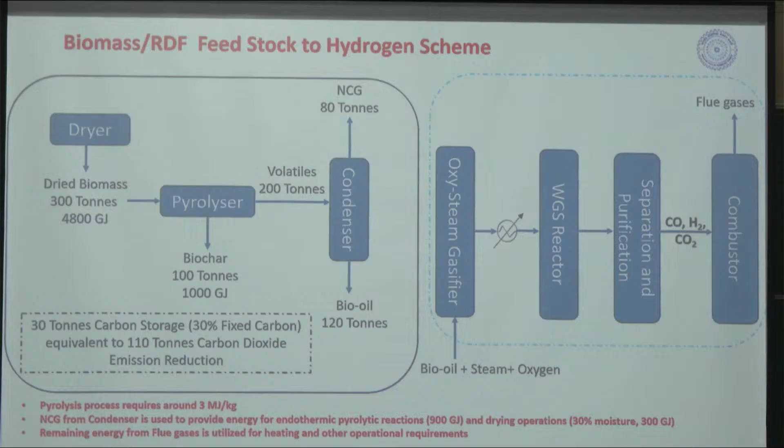If you do this, 30 tons carbon storage, 30% of the fixed carbon equivalent, which is 110 tons of carbon dioxide emission, and that's why the government is saying use bio-based refineries and convert it into whatever product you want. So if you have 300 tons of dried biomass, you can get around 120 tons. 40% approximately is the conversion factor. And you have biochar, you have several.

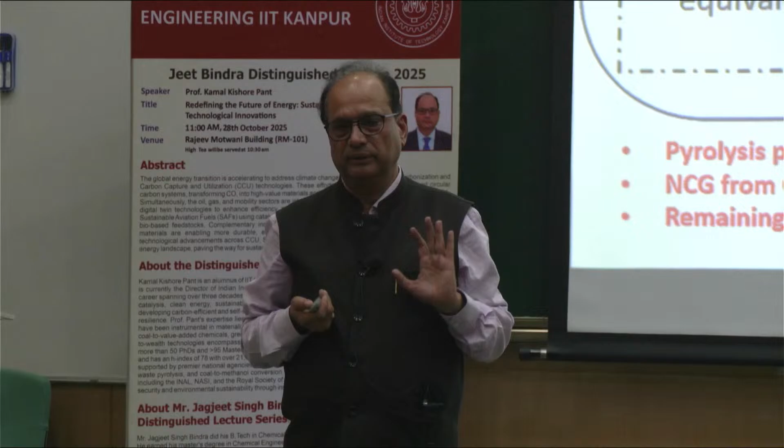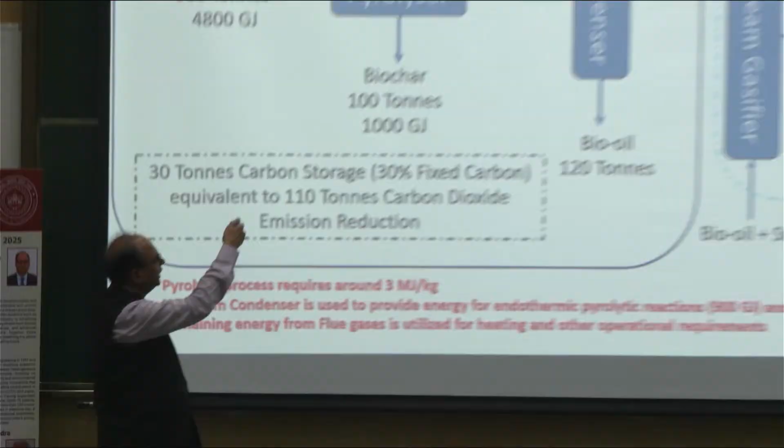Now, whether it is hydrothermal or pyrogasifier or pyrolyzer or slurry reactor or fluidized bed reactor, this is the design, because the challenges are there. The flow sheet looks simple, but tar is a big culprit in biomass compared to coal gasification. So whether it is plasma based, induction based, or some other heating where tar can be kept at its minimum, or you reform the tar. At 800, 900 degrees centigrade you can reform the tar, and again you will have hydrogen and CO2. So this is the opportunity: oxy, steam, water gas shift reaction, separation, purification, and the bio oil with steam and oxygen can be reformed to hydrogen. That is one of the approaches for utilizing the bio oil.

This is what we do. I am not going in detail. We are looking forward to a 1 ton biomass gasifier for hydrogen production. We call it BTH or XTH, so biomass plus RDF. We are looking for support from MNRE and some other investors and industrial partners. In UP itself there are 22 million tons of this biomass available per year, a huge amount. And RDF, 68 million tons is already there. Those things are being done in terms of development and gasification for power generation.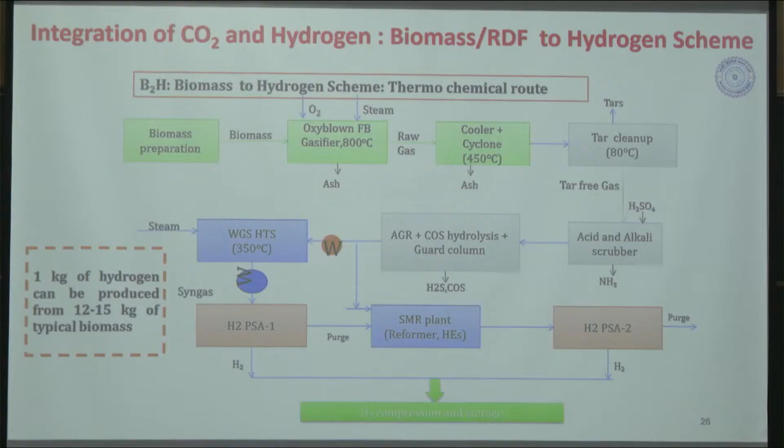But you see a typical flow sheet which can be used. Our analysis is that 15 kg biomass can give you 1 kg hydrogen, at a rate of 150 rupees per kg hydrogen compared to 450 or 350 in water electrolysis. So this is one of the methods. You cannot fulfill the complete demand, but partly green hydrogen can come from there, with hydrogen compression, storage, or hydrogen plus biogas methane, hythane, for vehicular application and commercialization.

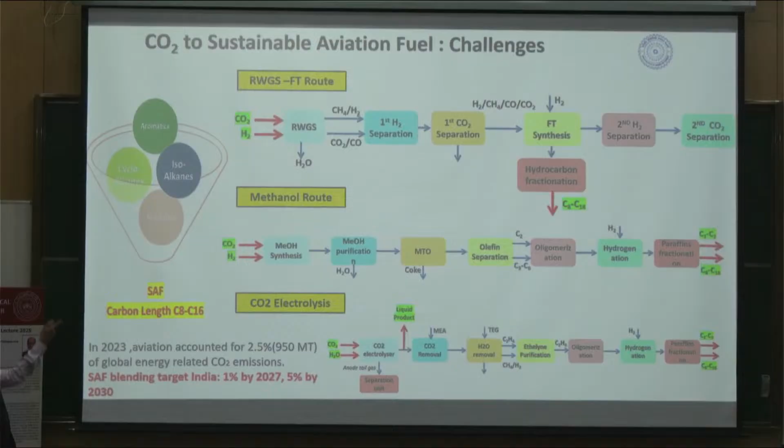Another important area is sustainable aviation fuel. The European government has already made a mandate for adding SAF, the SAF blending target. India has given 1% by 2027 and 5% by 2030. Where will you get this sustainable aviation fuel from? This is a substitute for kerosene jet fuels, aviation turbine fuels, and this is a green fuel.

So whether it is from biomass to bio-oil and bio-oil to SAF, or it can be from CO2 also. CO2 to SAF is very, very challenging. We have just started electrochemical conversion of CO2 to SAF. So this is the process.

If you look at how it can be done, opportunities are there. The entire process you see, 1, 2, 3: reverse water gas shift reaction, Fischer-Tropsch route, all of you know that. Methanol route, you convert it into methanol, convert methanol to olefin and then hydrogenate, because it's nothing but hydrogenation, isomerization, cracking and hydroisomerization. Saturate the olefin and get something in the C8 to C16 range of hydrocarbons.

That is the SAF, right. Sustainable aviation fuel is the huge demand for the future, because Europeans will ban all these aircraft unless they have these additive fuels which are green fuels. So this is also a very important and emerging area. And you have to understand the chemistry, aromatics, isoalkanes, normal alkanes, and how these can be obtained from a mixture, which is nothing but isomerization. Isoparaffins generally give octane numbers and all these things.

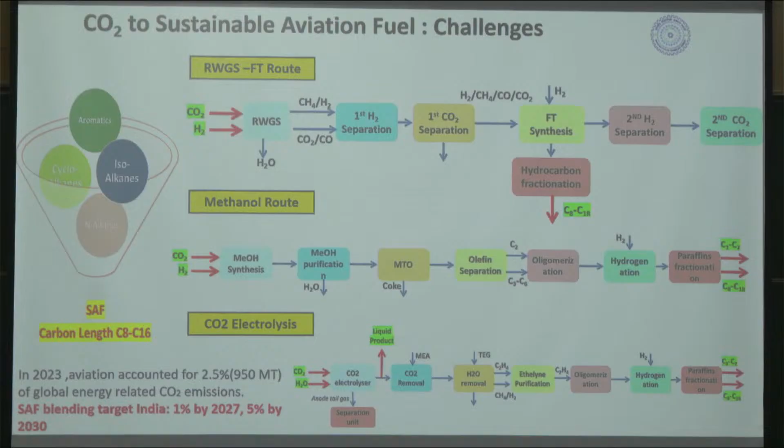Olefins are undesired, so saturate the olefin. Larger molecular weight hydrocarbons, their viscosity, pour point, freezing point will be challenged, so break them into smaller ones and isomerize them. Simple traditional refinery chemistry, right. But this is coming up again in a big way for the future. This is again the membrane, e-fuels which are coming up. The membrane has a lot of challenges when you talk about electrocatalytic CO2 reduction.

You have a cathode, you have an anode, I am not going in detail, but cathode material, anode material, then gas diffusion layer, everything is one step of the process. And integrate it and stack it. That's again a very, very important promising area for the future when you talk about green fuel, because the temperature requirement is just below 100 degrees centigrade, unlike 700, 800 degrees centigrade. Pressure requirement is also just atmospheric or 2-3 atmospheres.

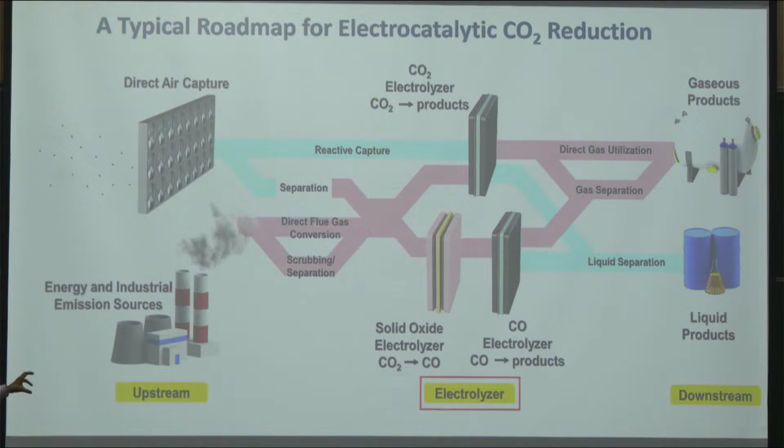It looks like a simple flow sheet, but these are the challenges, because at economical prices CO2 is to be converted to olefins for converting into SAF. Or even when you talk about water splitting, there is a lot of oxygen generation, which is called OER. Those who are working in that area know this, but the oxygen evolution rate is to be reduced. So OER, HER balance, and this gives you the challenges in terms of electrode, electrolyte, membrane and flow design.

A lot of CFD calculation, channel reactor design, is now required for the flow design. Electrode, you see the gas diffusion layer. Catalyst, electrolyte: liquid electrolyte, aqueous, non-aqueous, acid, neutral, organic. Membrane: cation exchange, anion exchange and bipolar. Everywhere there are a lot of opportunities to work for the future, and circular economy is very, very important.

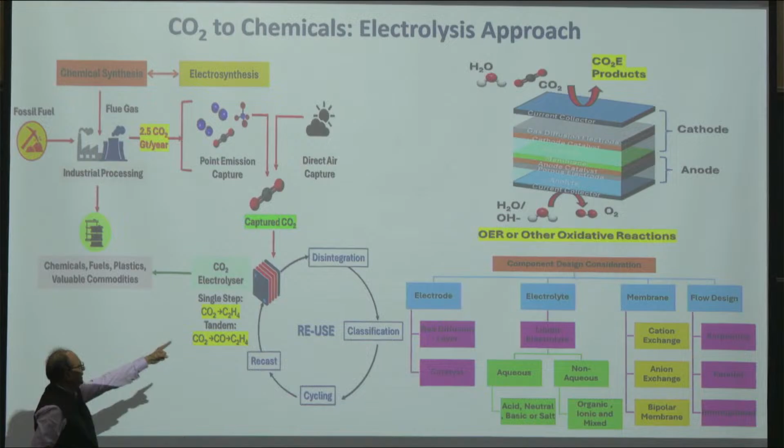Whether it is a solar cell for energy generation, life cycle assessment, when the life is 15 years, or a battery, life is 15 years, where are you going to take it? So it means waste to resource, I will not say waste, resource to energy or recovery is very, very important, and that is also to be addressed in future.

So this is the challenge. All of you have to work on electronic structure engineering. Which kind of metals, support, heteroatom doping, vacancy creation, because recombination rates and all these things are very challenging here. Vacancy creation, edge sites, so defects are to be created. Same thing for interface engineering, heterostructure support, single atom catalysis, that's important. Then super hydrophilic, super aerophobic. These are some of the areas where I think the new generation should take up research.

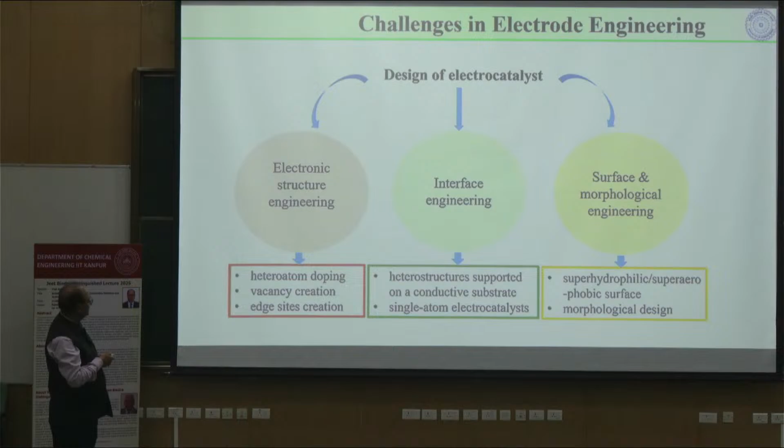So these are the technologies which are to be addressed across so many areas. One person cannot do it, one group cannot do it, so multidisciplinary, multi-engineering is the need of the hour, where we need to work together on a combined, module-based design for the membrane-based electrolyzer. And then stacking, because you have to talk about not 1 kilowatt scale, but megawatt scale. So a lot of industries are already working.

If you have the ideas, if you have a concept, you can just discuss with them, whether it is BHEL or NTPC or several other groups who are working on this: IOCL, BPCL, HPCL, refineries, petrochemicals. They are all now looking for a substitute for the thermochemical and working on electrochemical approaches, because these are the challenges which are to be addressed, and only academicians can do this. Catalyst stability, contaminant tolerance, that is very, very important.

Then mechanism, pH effects, channel design, humidification requirements, ion and water membrane transport. So all these things, I think we need to work in these areas. And this is what you see in the module, whether it is CCUS using membranes, so novel membrane-based capture and conversion in a one-pot tandem process. Because capturing and transporting CO2 to another process is also challenging, we don't recommend that. You capture it and convert it there itself.

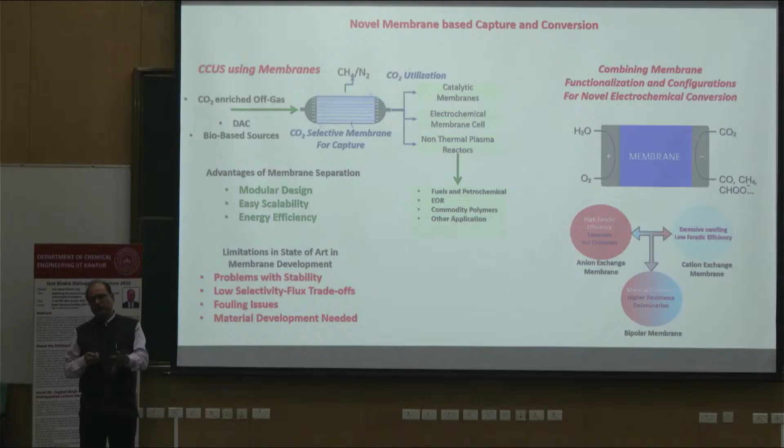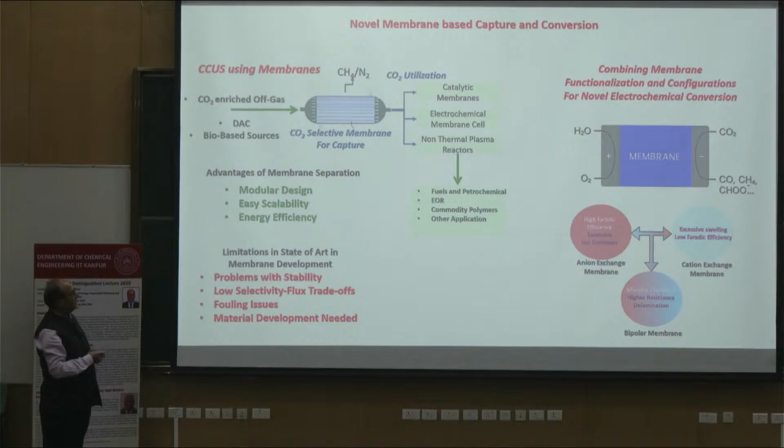This is also because of the transportation cost for carbon dioxide, whether you transport it at high pressure, the material of construction, all these things become very, very challenging. So if you can do it at source and in situ, combining membrane, functionalization, configuration, this is where electrochemical engineering is very, very important. All these things would be required.

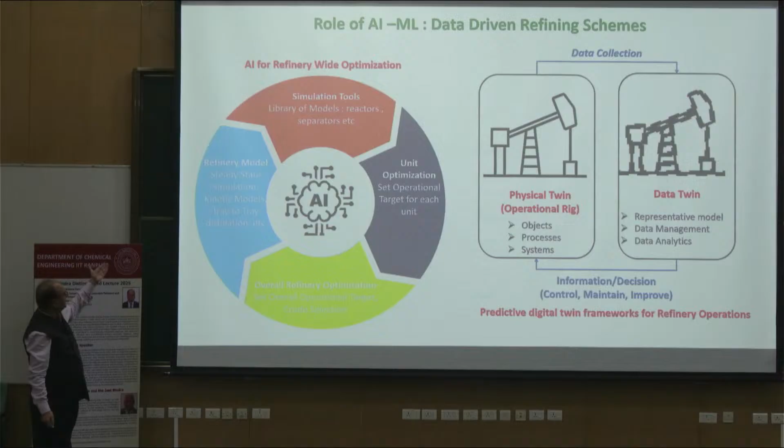This is where the refineries are looking in terms of steady state simulation, kinetic models, tray-to-tray distillation, because distillation is very costly, and overall refinery optimization in this closed loop. We need to think where refineries, petrochemicals and industries are looking forward: low carbon and climate adaptability, process innovation and integration, so ideas are very important. CO2 utilization is important, energy infrastructure is important, where 6 to 7 gigawatts of renewable power is required for refinery integration. Solar and wind would be one of the best options.

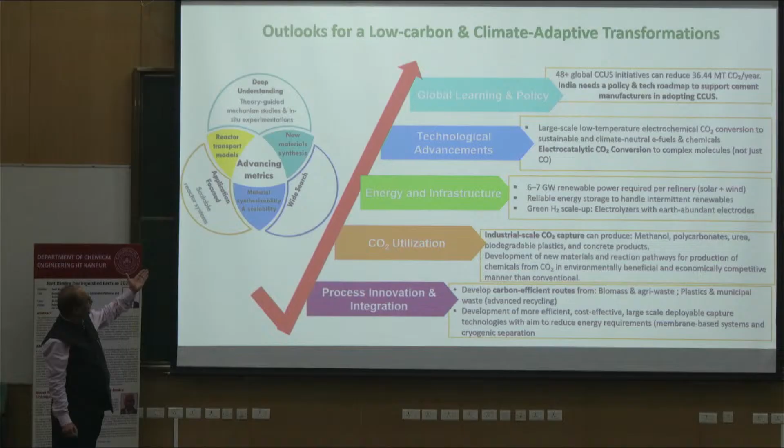Technological advancement, novel technologies are required, global learning, policy, these things are also very important and we need to work on it. This is where the challenge is. Academicians always think of research, invention, publish the paper, file the patent, and they stop there. But this is an era of transformational, applied research. From fundamental to applied would be required; one team works on fundamentals and another takes it to the next level, applies it, and this is TRL innovation where industry partners are required, finally the commercial market.

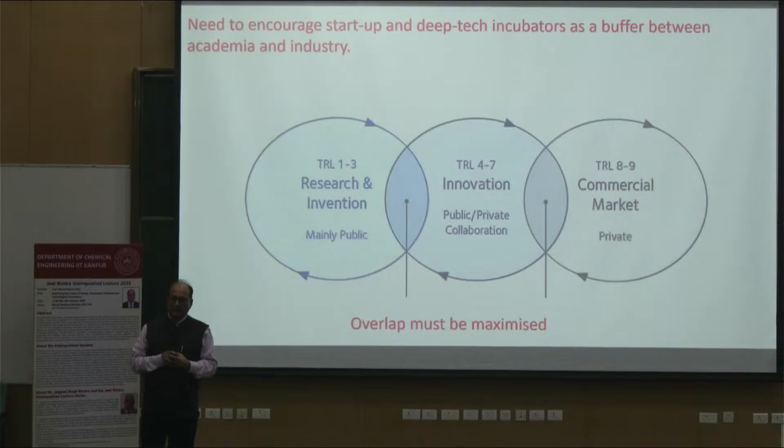This is very challenging, and most of the time we do the research, a lot of good work is done, but it is kept on file, papers, patents, and cannot be taken to the next level because of several limitations. So policies are also very important. The government should also give a thought, industry should also come forward, and wherever there is good work, wherever technologies can be taken to the next level, industries or government should support, and policies can be made.

I think the institute of technology development, the policy formation is also very, very important, and where again the role of academicians, industry and policymakers becomes very, very important. So finally to conclude, if you look at the future, we need to work on these areas.

I'm not reading all these points, but this is what you see, the subsidy amount which is required, because the government has to support these processes, whether it is solar, wind or some new process. The support which is required for 750 million ton per annum of carbon capture, whether it is utilized or stored, comes around 210,000 crores. This data is not taken by me. I have taken it from the ministry, the Niti Aayog data, and 210,000 crores is a huge amount of investment. But this is required.

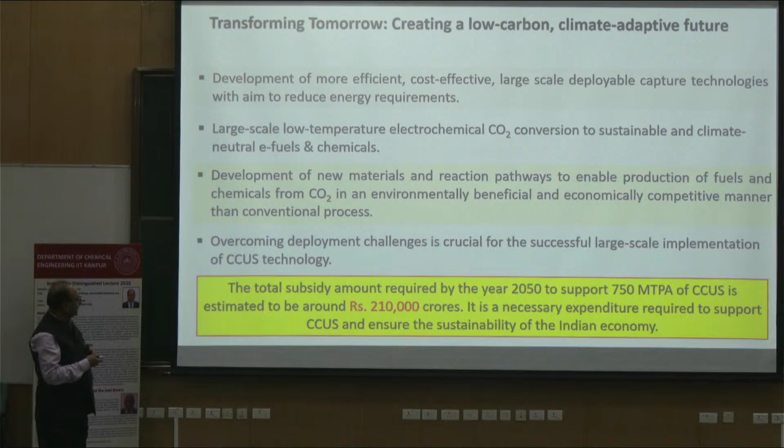We have to think about where this fund will come from, and then the government should support, industry should support, and I think that would be the future where we need to look at the success of the entire technologies. So I close myself here.